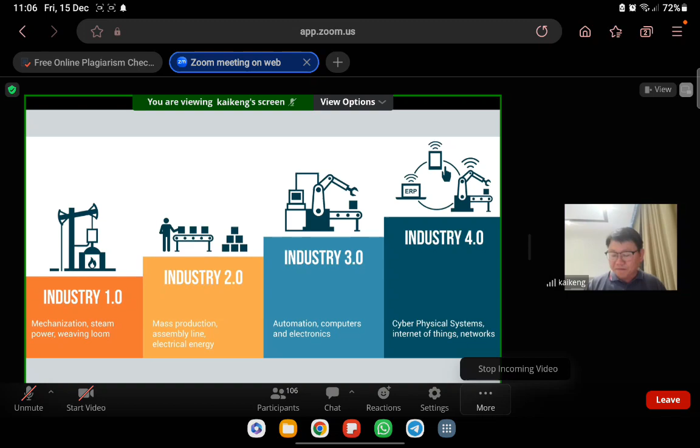If you look at this chart, Industrial 4.0 covers some characteristics. First of all, you must have the related sensor monitoring, industrial IoT as the industrial application, the quality that we want to monitor, and internet security. For the automation part, it is also very important when you have all this data, and what the purpose is that you want to monitor.

Next, we have the clarification process, or some of us call it physical chemical treatment. Physical chemical treatment is where we adjust the pH and introduce coagulant and flocculant, so that the colloids can be separated from the liquid, partially dissolved to a solid form, and we allow the solid and liquid to be separated from the system. A clarifier is a unit operation that allows the liquid and solid to be separated.

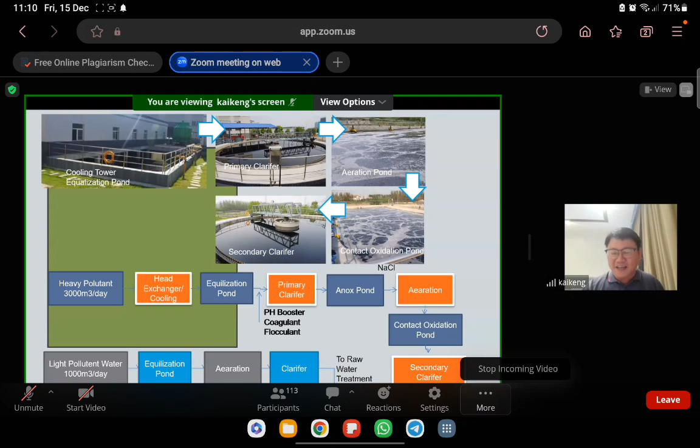Are there any questions so far? If not, we will go to the real scenario of wastewater. Based on this picture, students can see it's very nice, right? So this is what happens in the actual wastewater plant. If you look at those colors, it is an old building, and a lot of it is not what we are expecting. Because in real life we are talking about economy, and we have to make sure the factory can make a profit. So a lot of the time it is much different from the ideal, which looks so nice when we talk about the process itself.

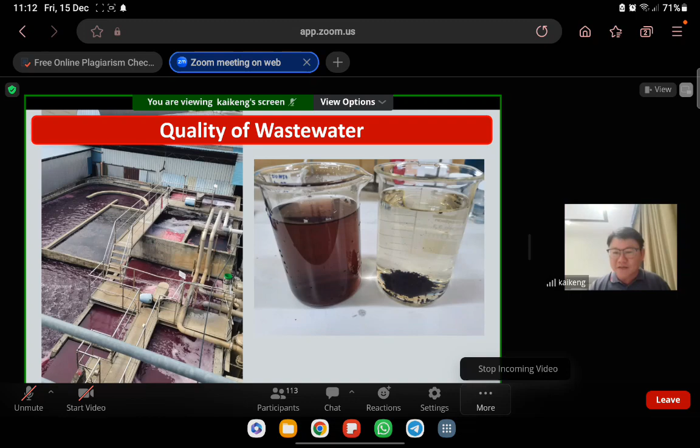So this is what happens. If you look at the left-hand beaker, this is the raw wastewater. Students may wonder what this chemical process is and why we are adding chemicals. If you look at the beaker on the right, you can see after we adjust chemicals and make sure the right dosage is there, the solid and liquid start to separate. The supernatant of the water becomes very clear. So this is what real life looks like instead of the ideal.

When we talk about the quality of the wastewater, we must understand the purpose of the water treatment. When we talk about IoT, we want to monitor and make sure all the monitoring is up to standard, but we must set a standard for this system. So here I have put in a very basic part. If you look at the beaker, EQ means the equalization pond of the wastewater, meaning this is the first stage of the wastewater.

A lot of people will aim for Standard B. If you look at the chart, we have Standard B, which is the local standard set by the Malaysian government. If you look at this picture, the clarified water is not that clean. And for some customers, the factory is located at a water intake area, meaning they are discharging upstream of the intake.

There's a water treatment plant taking the water for consumption purposes. One example is that at some of the water plants, when there is heavy rain, we have no water for consumption because some of the discharge from the wastewater treatment plant is out of standard. So if your plant is located at standard A, then you have to fulfill standard A.

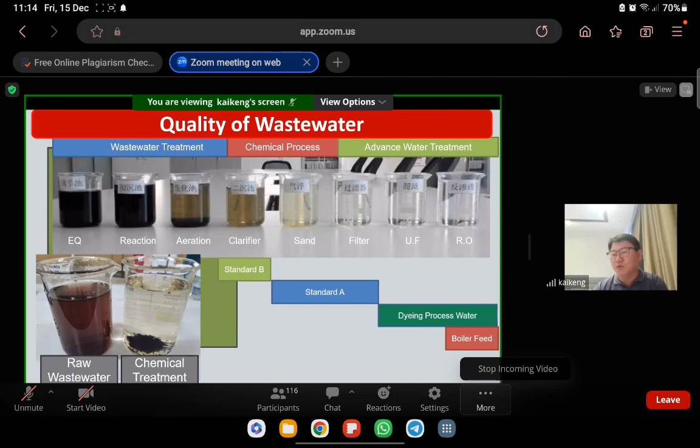Now, just now we mentioned the quality. So once we know the quality or the purpose of the water treatment plant, as I mentioned, some customers' objective is to make sure they comply with standard B. Standard B is the general discharge standard. So if you look at it, this is the general wastewater plant.

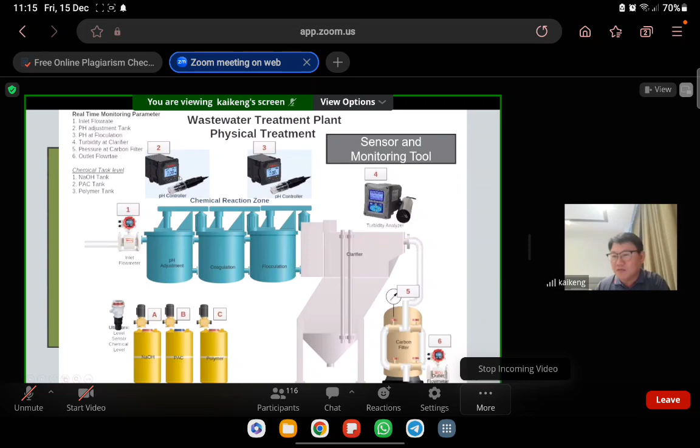Most of them will have an inlet flow meter to measure how much wastewater is going into the wastewater treatment plant. They have a pH controller to see what the raw wastewater pH is. Next will be the adjusted pH after the chemical adjustment, what sort of pH we are getting.

And next, at the clarifier, as you can see from the beaker, if the water is clean, then the turbidity is low. So when we want to measure how clean, how effective our treatment is, we can install a turbidity analyzer to ensure that the chemical we put in and the pH we adjust produce the result we want. So low turbidity means the chemical treatment is effective.

Next, it will go to the filter. Here we install a pressure gauge. This pressure gauge will show whether the filter needs to recycle, time for what we call backwashing.

Before it's discharged, the Malaysian government requires all treatment plants to install an outlet flow meter. This is to ensure the flow rate at the inlet and outlet of the wastewater plant is about the same. We want to make sure no leakage is happening in the wastewater plant.

Next, if you look at this side, this is the chemical portion. We know that a lot of the time, mistakes might happen. So for chemical preparation, you have to make sure there is chemical at all times. So we put in this level sensor to ensure the chemical storage is there.

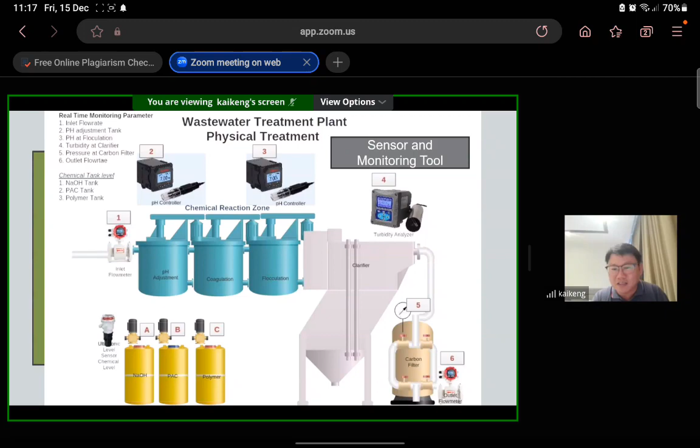So altogether, if you look at it, we have 9 parameters to monitor. Students, bear in mind, this is one sample of a water treatment plant, the sample I took. So if you look at the sensors and monitoring tools, we have flow meter, ultrasonic, pH, turbidity, and pressure gauge, and all of them together are 9 parameters.

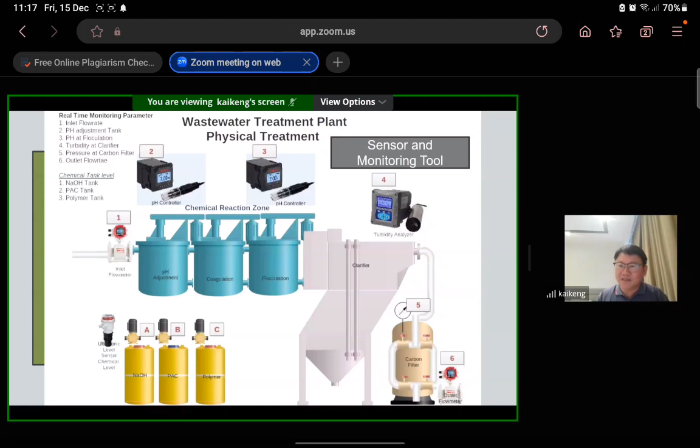Okay. So after we have all these sensors and monitoring tools, this is the time when we need to collect the data. We collect data by sending it into a recorder or chart recorder so that it can transfer to a PC to record and to process.

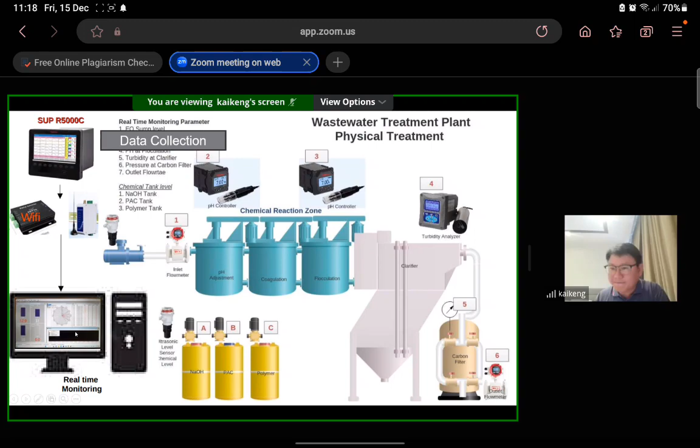This process is actually very similar to Industrial 3.0, where we are talking about a PC, personal computer, to process the data. Later, I will show some of the data, how it was monitored and recorded. So from our wastewater treatment plant, we send all the data collected and transfer it into our PC. This is considered Industrial 3.0.

And next, after the data is collected, we use a gateway to send it to the cloud. And once the data is sent to the gateway, most of the sensors are what they call IoT, which means Internet of Things. So we managed to let all the sensors and our instruments go to the internet to monitor further.

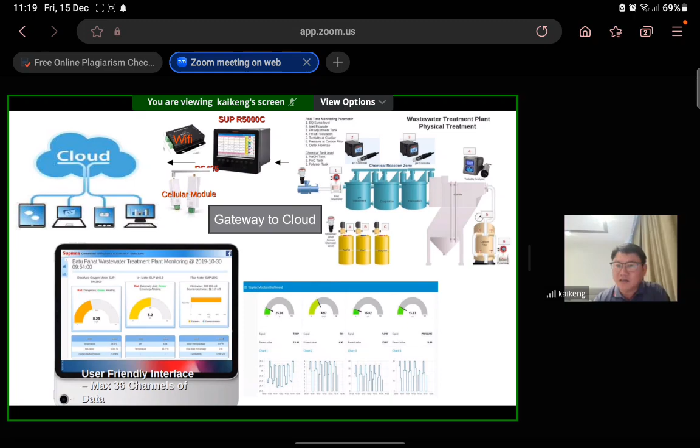Right, students, is there any question you'd like to ask, or want me to slow down and explain more? Let me know. Otherwise, I will just go ahead to further discuss Industrial 4.0.

So just now we mentioned data collection. There are quite a number of ways you can collect your data. Here we are using a paperless recorder. As you can see, all the sensors that we use in industry normally have a standard, which is that each sensor will give you an output. This output can be a millivolt output, it could be 4 to 20 milliamp, or it could be something else.

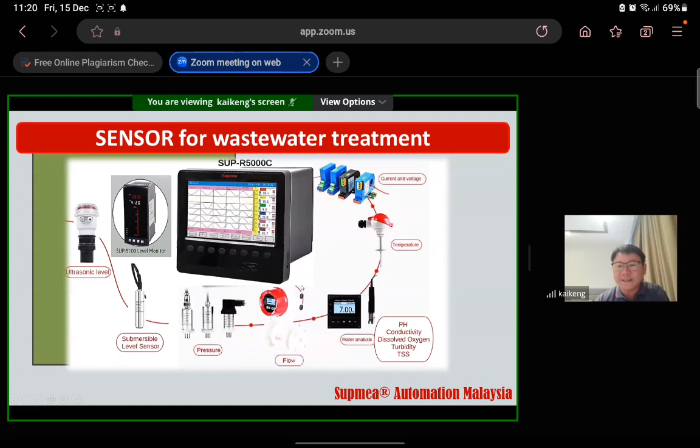I beg your pardon. So all this data will be recorded somewhere so that we can transfer it to a PC. So this is the selection of what we do here. Say you have quite a lot of data you want to collect, you can have a few of these machines, the data loggers, to keep all the data. And when we want to transfer to a PC, normally in industrial standard we use RS-485. It's the communication language that we use to communicate with sensors and machines.

So to transfer the data, there are a few methods. First is using a hard wire connection to our PC. Secondly, you can use LoRa, long range radio wave. Long range radio wave, I think, is very famous here because it consumes very low energy. Or if your site has Wi-Fi, our machine can connect to the Wi-Fi.

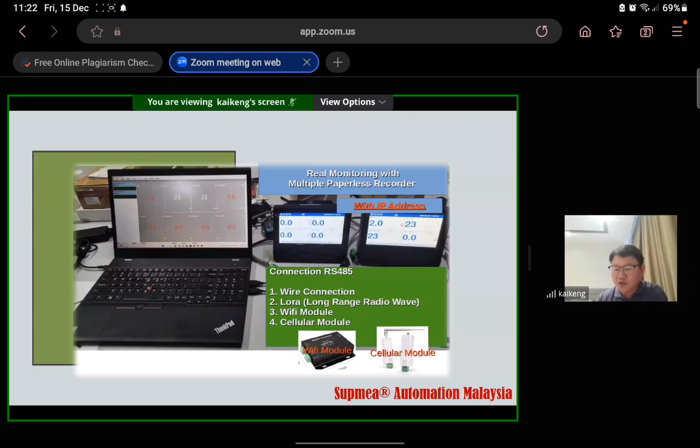And in some cases, if your wastewater treatment plant has no Wi-Fi, or there are a lot of buildings blocking the radio wave, you can use another option, which is a cellular module. A cellular module basically uses Maxis or Celcom to transfer the data. These are some of the options we can use to ensure the data is transferred to the cloud and to our PC.

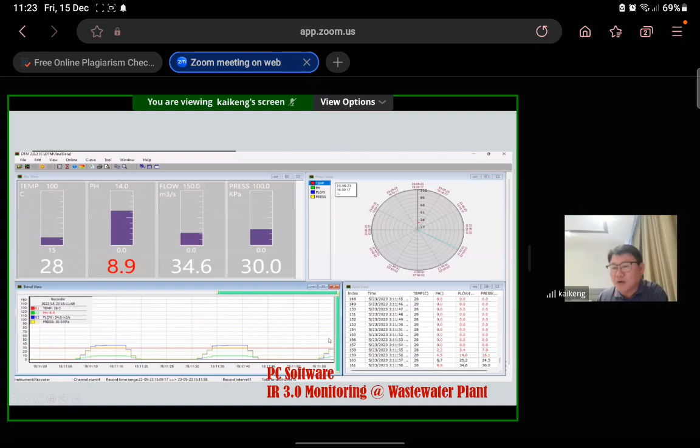Next, this is the interface that we mentioned for monitoring all this data. As you can see, when some of the data is out of range, a typical example is pH. We know 7 is neutral. If it's too high, like 8.9 or more, the indication will change to red to alert the people who are doing the monitoring. And all the charts and analysis will be recorded by the computer.

Next, there are a number of interfaces for keeping the data, or what we call a dashboard of the water treatment, to make it easier for us to understand and digest all this data. If you look at it, this is TrendView, where you can see it's fluctuating. If anything happens to the wastewater plant, say the incoming water pH is not stable, you will have this type of trend. This is a generated value. I don't think in any wastewater plant the fluctuation is that big.

Okay, if you look at the bar view, you can see some of it is changing to red and some of it is not. So some action can be taken.

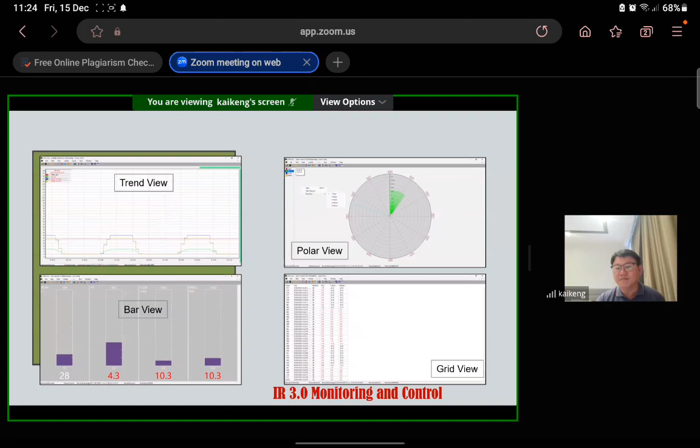All right, now from data collection, we want to send it to the internet and make sure all the devices are IoT, Internet of Things. So we must have a gateway. This is where all the data is collected and sent to the cloud. The software and the industrial application are actually developed in Malaysia. We are using Telegram as the platform to monitor our data.

The benefit of Telegram is collaboration between colleagues, because in a wastewater plant you will not have one person in charge of everything. You must have a group of people, for instance 4 operators, 1 competent person, and your manager. So we group everyone into this group. And we can monitor it from anywhere in the world, as long as you are linked into this app. So collaboration will be very easy because everyone can view and everyone can see.

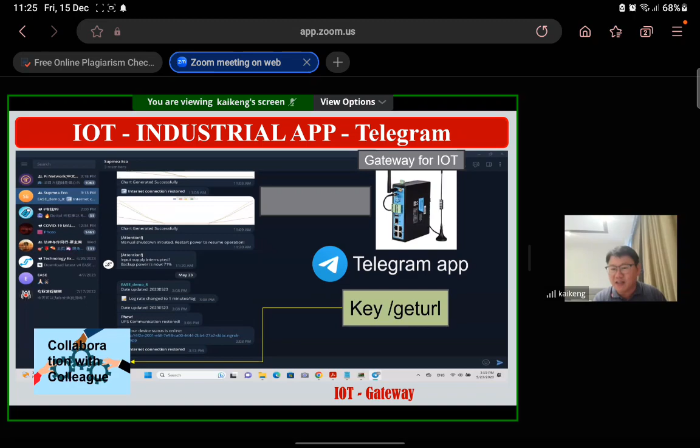So when you log in the system, this is the indication. This is some data about our internet gateway. So if you log in into the gateway, you can see what is the condition of the gateway, whether it's too hot, or the battery is still operating properly. Because our gateway has some power backup. This one is just to ensure that the data won't just break down immediately. So we have about 24 hours of battery backup on any site.

Next, there's quite a number of options. First of all, you can trace back your data. You can view the dashboard of your wastewater treatment, and if you want to download all the data from maybe a few months ago or a summary of this month's performance, you can download the data easily from this IoT.

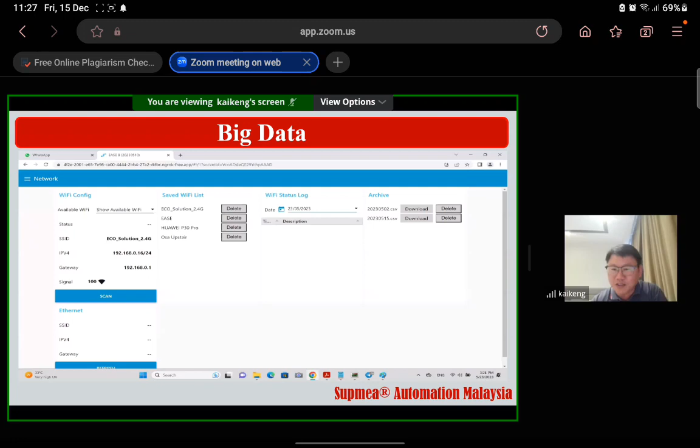This one is one example of how you can get all this big data, because all the data is being stored. And a lot of people ask me, we keep so much data, what are we going to do with the data? So certain things have to be done. I think the most simple one is we can let it plot some graph and analyze those data, because this one is a very clear indication that your production changes a lot.

The production changes from the wastewater plant are actually indicating there might be some leakage of product, because in production we don't want to waste a lot of chemical or have some leakage of the product. So if there's a change in the wastewater plant, meaning that in the manufacturing process there is some problem. So it is a valid indication that certain improvement has to be done.

So if you draw this graph, you will realize what's happened in the production, maybe there's some change of product, there's some leakage of certain chemical, or there's some human error that happened in the production. So that's what we can do. So you can send a direct command into our gateway. It will help you to generate what we call a graph here.

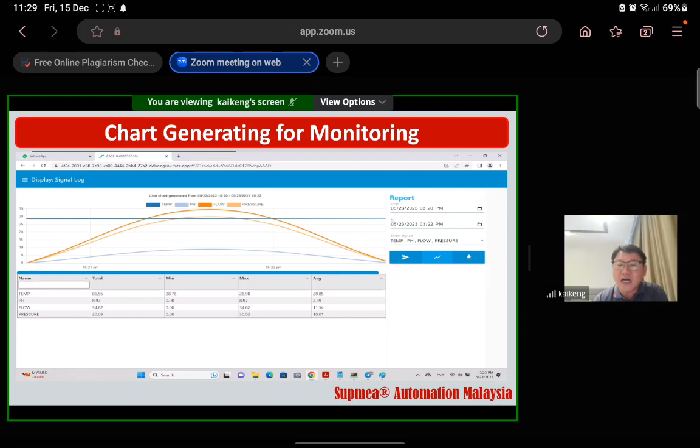If you look at it, in this chat room, or what we call a monitoring IoT system, whereby all these people will be added into the group, it will give you a summary about what happened in the plant, and not just give you a warning, alarming people that something is failing. So if you look back, you can generate the graph every month or every day. It will generate this thing. So you can analyze the data and you can find out more information about the system. So this is what happened.

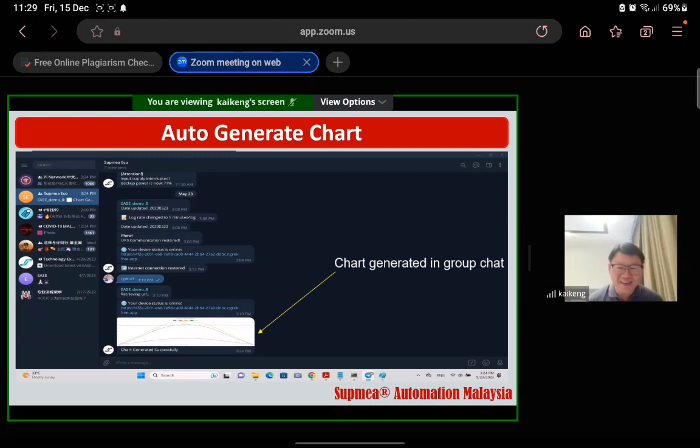Let me see, we have half an hour left. Okay, so let's see what we are having.

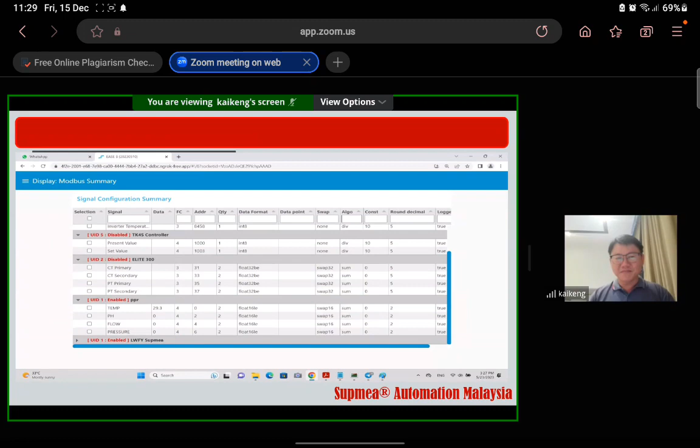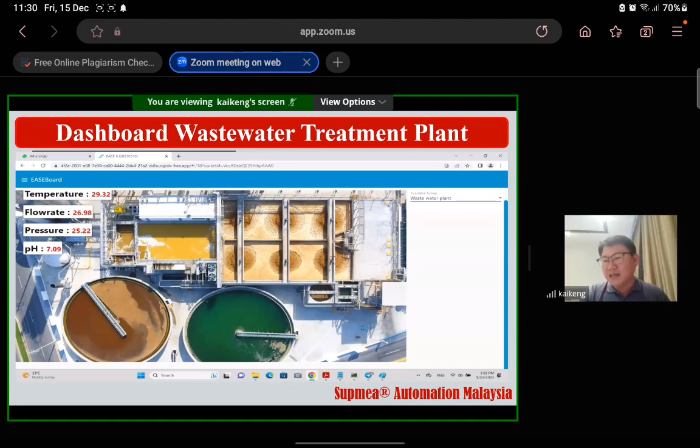This is the dashboard of the water treatment. So you can put in all this critical data. This one is real time. So when you log into the system, you go to the dashboard, you will see this data, and the data is normally blinking. You can set it so every 10 seconds the data is renewed. So anyone overseeing, or the boss who wants to see what happened in the wastewater plant, they just need to log in. Then you will know what exactly happened at our plant.

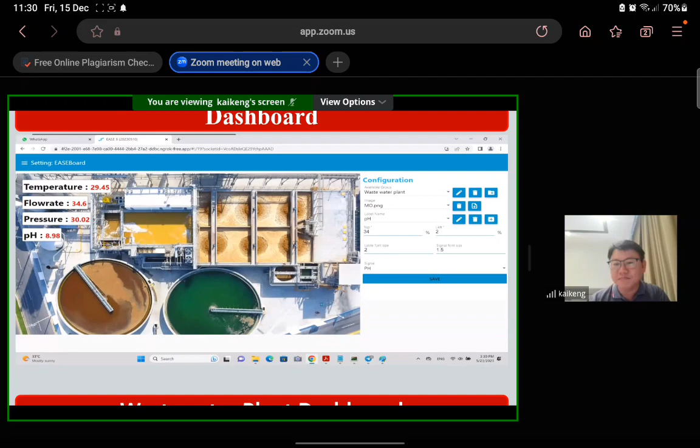So as you can see, you can put in some comment and make sure you get the percentage of the water. This is another view of the plant. Okay. The software that we developed so far, we can customize pictures and we can customize a drawing into what we want. Say, for instance, your system doesn't look like this. You want to have a customized picture or customized flow diagram. We can customize it to what you want.

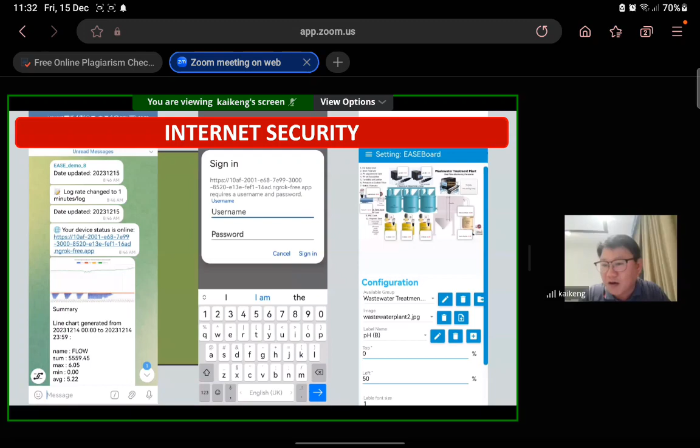Next, about internet security. So just now, when we talked about IoT 4.0, we have to make sure the data is secure. So anyone who is in this group will be able to view our system and our flowchart. And what they need to do is when they click on it, they are required to key in a password so that all this data is secure. So once you log in, only you're able to access what we call this dashboard of our water treatment.

Okay, this one is some of the data which is underdeveloped. We understand that for water treatment, we must analyze the water. So this is another way we analyze, through what they call the season effect. Because sometimes when the weather is hot, we will have a lack of water and we need to use more wastewater, recycling the wastewater to become part of the production water. But the cost of wastewater is high compared to river water and SAJ.

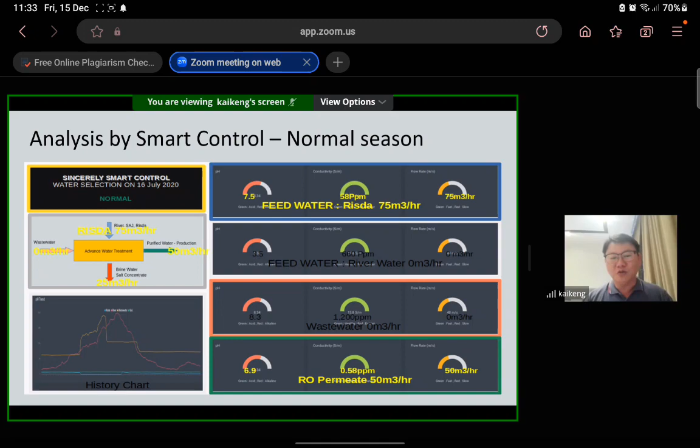So if you can get the meteorology data on the raining pattern, you can start to estimate when is the time you need to use your wastewater as the feed water into your process. Okay, if you look at the history chart, which we bought from the meteorology department, we know that the dry season of Malaysia is about June and July, but it is somehow changing. So we can't really say that a particular month is really the drought season. So if we can predict it, then we will know when is the time we can process our wastewater to the best of it so that we can recycle the wastewater.

I think students may have some doubt. Why don't we just use all wastewater rather than sometimes using wastewater and sometimes not, to process until RO? The reason is if we use river water, the treatment cost is about 10 cents to 20 cents. While if you process the wastewater to become recyclable, the cost is about 2 ringgit per meter cube. The cost is much, much higher. But when you have no choice, in drought season with no water, then you have to use your wastewater.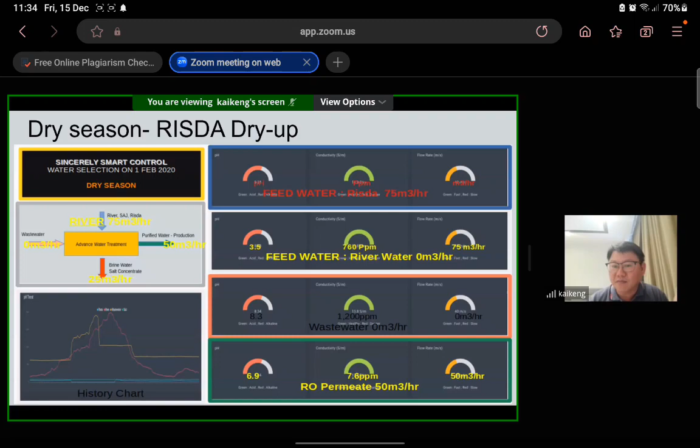This one is when you have drought season. And here there's a parameter which is TDS, the total dissolved solids. So when you have drought season, seawater comes and starts to contaminate the inland water. I don't know if anyone has experience, if you live near the quayside, you will see some jellyfish start to swim into the river because the salt water starts to go inland. And all this salt water will have an impact on river water treatment. So if you have a lot of this, then it is time to stop the river water treatment and push for 100% recycled wastewater.

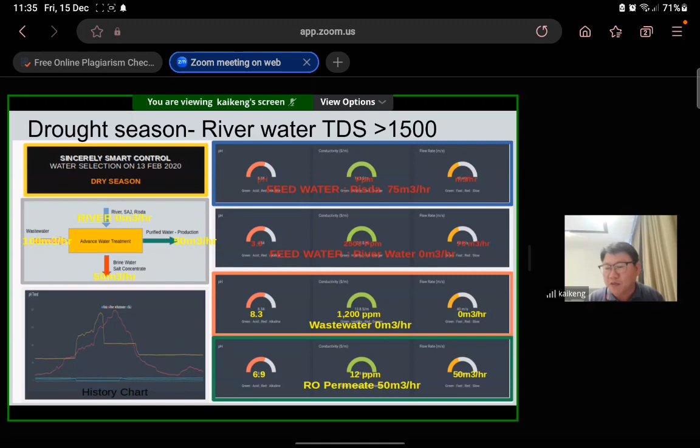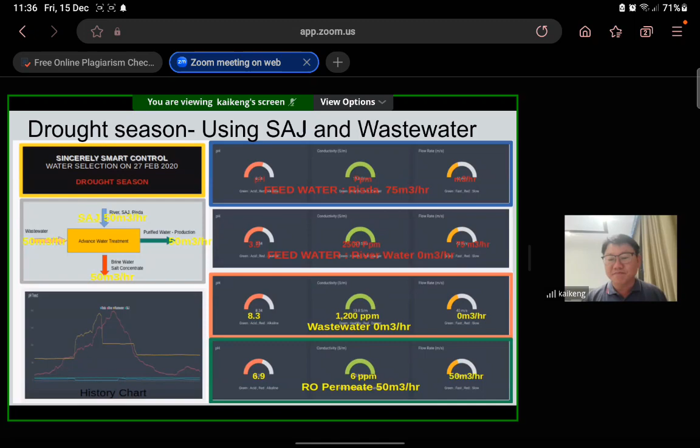And somehow, our government water, what we call SAJ, when it's drought season, the supply of the water will have issues as well. This is the time for us to process more wastewater recycling. Okay, so this is how you can mix wastewater with SAJ, by understanding the chemistry or the content of the TDS inside. So I think my presentation will be quite short.